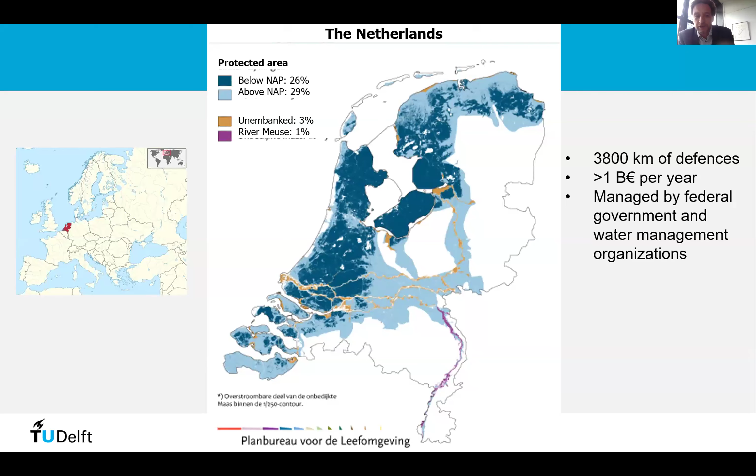And to protect these areas from flooding, there's around 3,800 kilometers of defenses, which we'll see later. And because it's a national priority, there's also a large continuous investment budget of around 1 billion euros or more per year to continuously invest in upgrading the defenses, river systems, and so on, which is done in an interplay between the national government, Rijkswaterstaat, and local water management organizations.

A bit more about the system, and today we'll focus more on the coastal system. We have here what we call the Holland coast, North and South Holland, a very nice sandy coast with high, strong dunes, which is kept in its present state and volume with large-scale nourishments.

After the 1953 disaster, where a large part of the southwest was flooded, a whole series of dams has been built to what we call shorten the exposed coastline. Storm surge came in here from the North Sea to those islands in Zeeland in the southwest, and dams were built to block that storm surge. Some of those dams are closed dams, and others are, as we'll see in a minute, storm surge barriers, like the Maeslant barrier near Rotterdam at the entry towards the city, those two massive gates preventing the storm surge going in.

And here, if we go more to the north, you see this red line, which is what we call the Afsluitdijk or closure dam, a 32-kilometer dam which was built after the 1916 storm surge. This was still open sea. Amsterdam's here. As a response, a dam was built to, again, shorten the coastline, preventing that storm surge from coming in. And as you may also know, large-scale land reclamations were built behind it. For a long time, it was the longest dam in the world, but in Korea a dam was built which was just a few hundred meters longer. This one was finished in 1932.

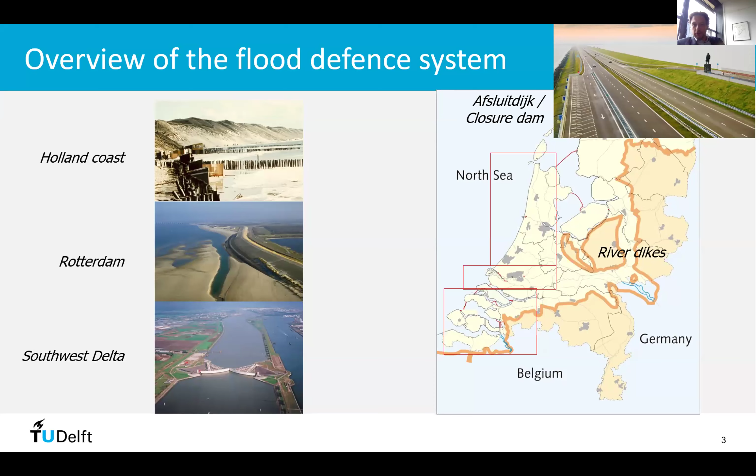And of course, given the low-lying nature of the Netherlands, there's a lot of attention and interest in the possibilities of sea level rise. If we look at the global scenarios, which are also downscaled to the local level, we see that projections differ between 1 and 2 meters in the coming centuries in case of the unlikely low emission scenario with only a 1 degree warmer world, and 2 to over 5 meters in a significantly warmer world, 5 degrees Celsius. There are also IPCC scenarios which project even higher sea level rise, but climate scientists indicate, well, we're not sure and they're unlikely at this moment.

And not surprisingly, a lot of the attention goes to those high-end yet low probability scenarios, for example, 10 meters. If we look at the Afsluitdijk, the closure dam, there's the statue of the engineer who invented it, Cornelis Lely. And Greenpeace already put him in a life jacket. Indeed, if we talk about 10, 15 meter sea level rise, the statue of Lely will be fully underwater. And it will be very hard to defend the west of the country from these orders of magnitude of sea level rise with storm surges on top.

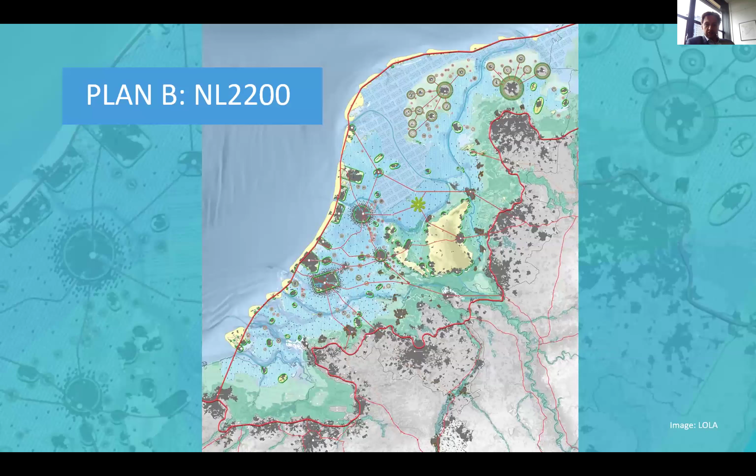And driven by those scenarios, there are planners that really think in a futuristic manner about the future of the Netherlands. Maybe we can retreat to higher ground and build our cities there and have a few floating cities or archipelagos. There are also images like these, Amsterdam underwater, or our other major city, Rotterdam, underwater, which of course trigger a lot of attention and debate, but they focus on these high-end, very far away scenarios.

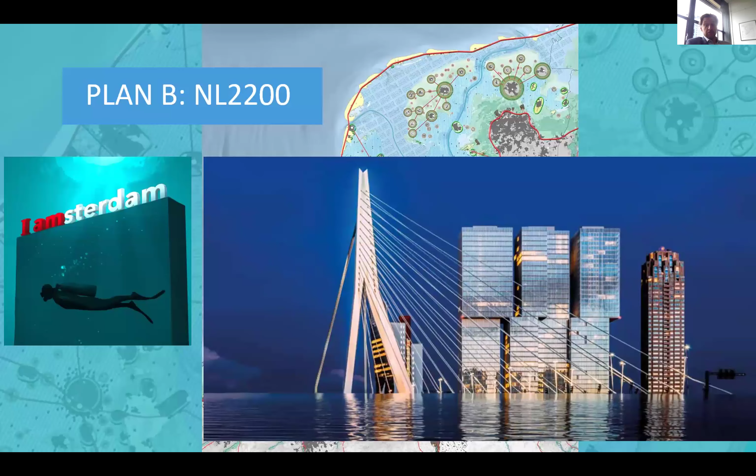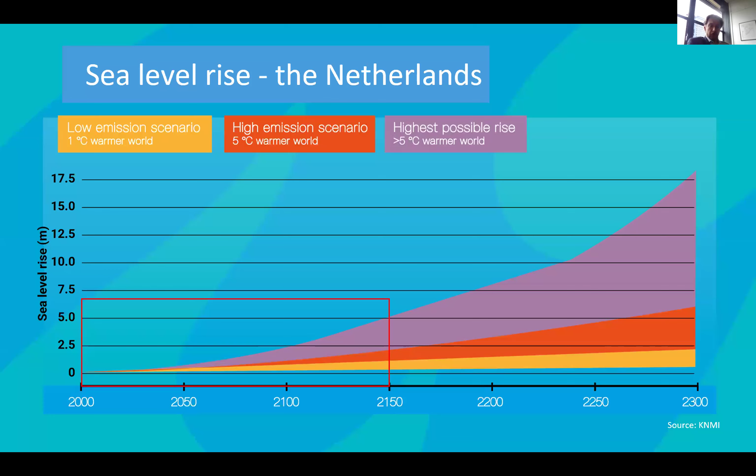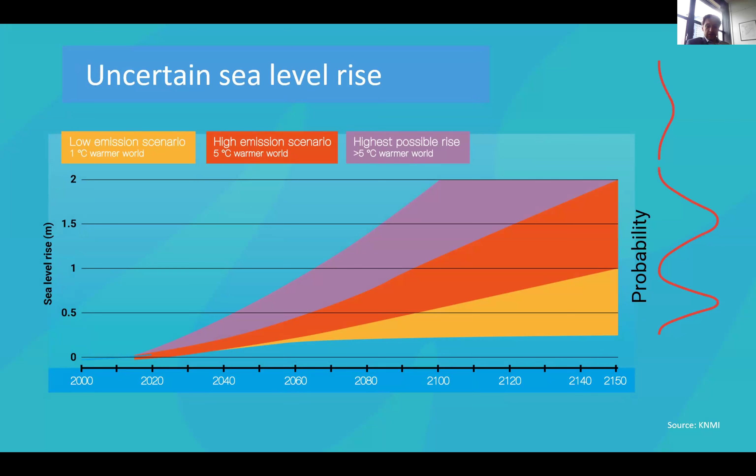As engineers and planners, we also think let's look at planning horizons. Typically for infrastructure, we take 50 to 100 years, but let's extend it to 150 years and zoom into the sea level rise that we can expect then. And then we are talking about these scenarios. So even in the higher end scenario, 1 to 2 meters. And recently, we've also been working with statisticians and risk analysts on the Bayesian approach, where probabilities indicate a degree of belief: bringing together different expertise, how likely are the different scenarios, what is their probability?

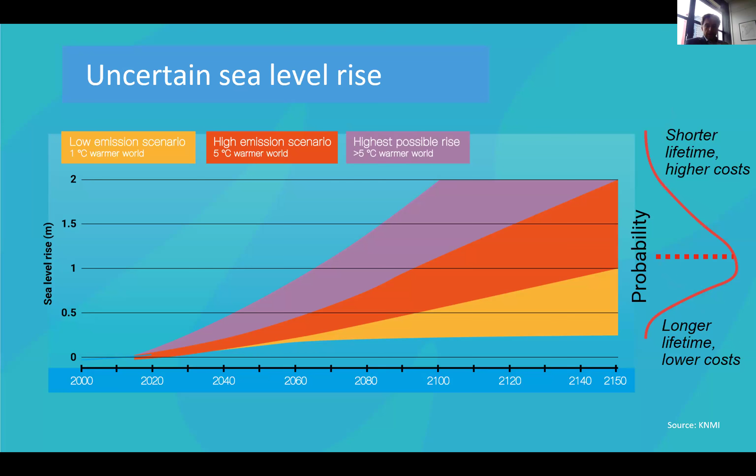Can we also come to a combined probability distribution of future sea level rise? And we also coupled that to, let's say, the cost: if we do coastal intervention, should we base ourselves on the high scenario, where we have a higher cost but build in extra safety, or should we go for the lower scenario?

And the outcomes were that, if you have those different options connected to the likelihoods of the scenarios, an approach somewhere in the middle or a little above the middle, where you kind of balance out over-investing and under-investing, seems a reasonable approach. If you do that, of course, if sea level rise goes faster, you have to come back a little bit earlier. If sea level rise goes slower, then you have a somewhat longer lifetime of your infrastructure.

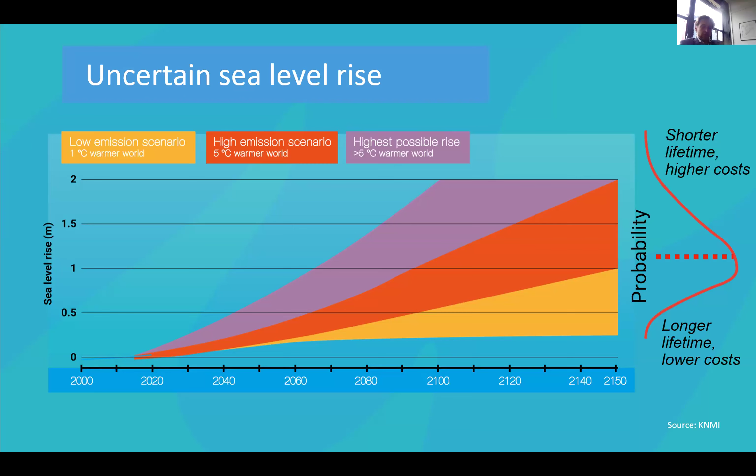But even in those high sea level rise scenarios, we would expect 1 to 2 meter sea level rise in the coming century. And the question is, what can we do, and what are our adaptation options in case of the different ranges of sea level rise? Then it's also wise to look back a bit and say, how much have we adapted over the past century and in the past decades?

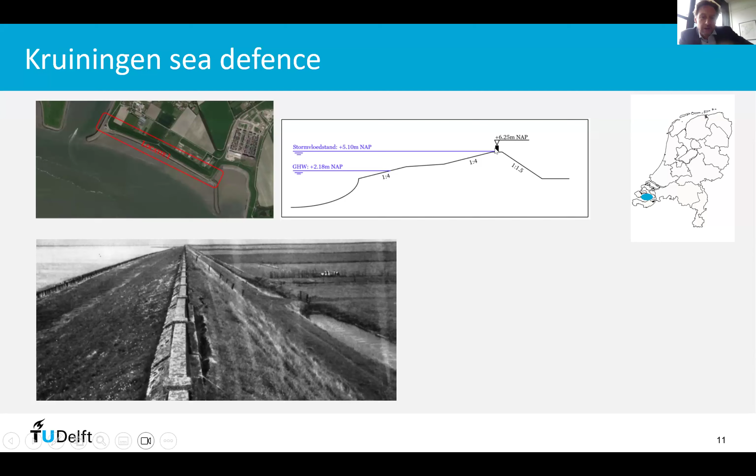And here we zoom into the Zeeland area that was flooded during the major storm of 1953, which also affected the UK and Belgium. And this was the sea defense at Kruiningen before the storm. So a 5-meter high, what we call, embankment dike with a crown wall on top going to about 6 meters. This is what it looks like now. And one of our students made the cross sections of that defense over the last decades. So it started, in green, with the 5-meter high defense with the crown wall on top.

It was after 1953 upgraded to 7.5 meters, and 15 years ago it was upgraded to 9.5 meters. So already within 70 years this has been upgraded 3 to 4 meters, and in case of an extra meter of sea level rise we would have to add to that. So our previous generations have been able to adapt the defenses in many parts of the Netherlands for several meters within a couple of decades.

And in that context, adapting for 1 or 2 meters of sea level rise for a defense like this seems feasible, at least from a technical point of view. However, if we go higher, as you see here, we also go wider. And in a densely populated country, that may also lead to some interferences with existing functions and spatial planning.

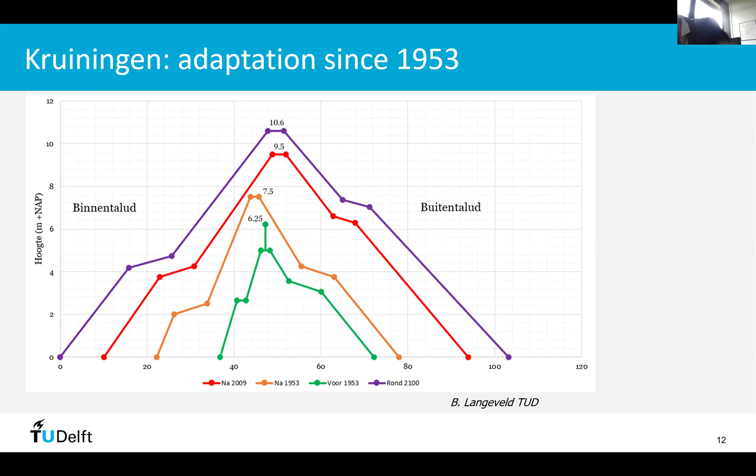I'll plug in my power for a second, just to make sure I'll stay with you for the rest of the presentation.

That's why we've been systematically reviewing the various types of coast and asking, what are the adaptation options and how would they scale in the future? As mentioned, for the Holland coast, the sandy coast, there's the flexible nourishment strategy, shifting from really localized nourishments to mega nourishment. This is the sand engine or sand motor, where sand will be distributed along the coast over time. Currently, it's about 12 million cubic meters per year.

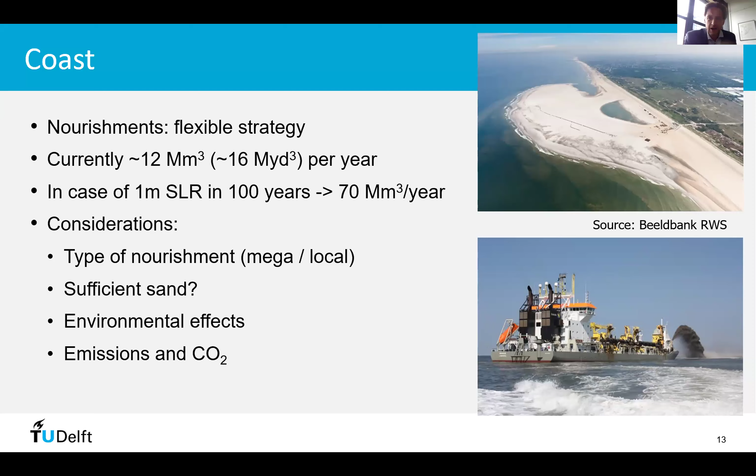In case of a meter of extra sea level rise, that would scale to 70 million cubic meters per year. And that seems, in the current context, feasible in the North Sea, with a very large sand supply and efficient dredgers that work at relatively low cost. For other parts of the world, for example Singapore, where sand is very high priced, that may be a different story. And people are already thinking about how we can scale up that process. What are the areas where we can win or mine the sand, if you will? What are the environmental impacts?

And the expectation is that in the current reservations, at least for the coming 100 years, there's enough sand available, and that more is possible if we would allow more dredging or also use the wind farm areas. And there are also interesting ideas: dredging is now often done with fossil fuels, so to link it to wind energy generation. And of course, we have to think about the environmental effects.

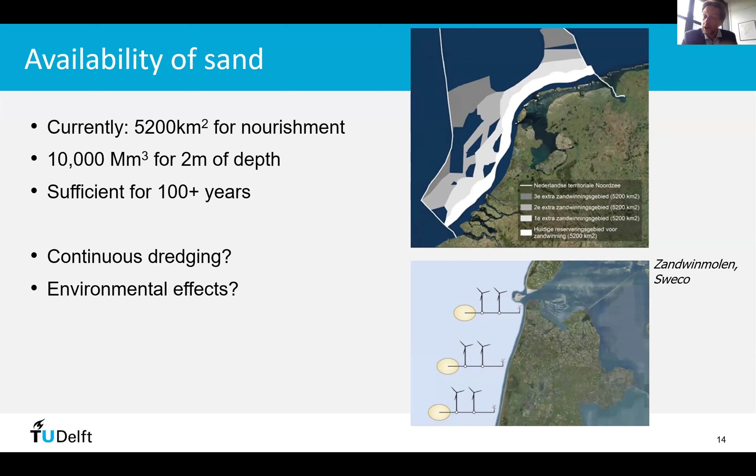I mentioned the storm surge barriers. So these are in other parts, the southwest, these are the gates that are normally open. Here's the Eastern Scheldt barrier to allow tide to go in and out, but can be closed during a storm surge. And these were built after the 1953 disaster. And there in that system, we already see that there's the barrier, behind it the system with intertidal flats

and dikes, that those intertidal flats are already decaying because of the narrowing effect of the barrier, because of some other effects. And there, a strategic discussion is taking place. Well, should we improve the barrier by closing it more often and even structural reinforcement? Should we partially remove it and strengthen the embankments around the estuary and to mitigate the environmental effects? Right now, they already started nourishing those tidal flats, basically to help nature a bit.

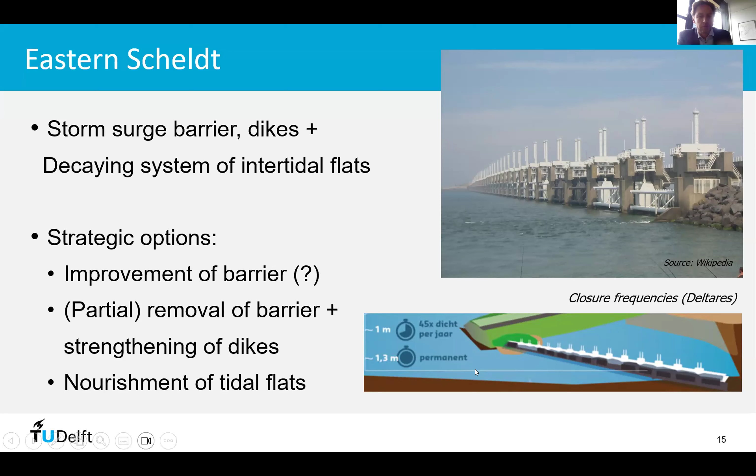And so for this estuary, we see that the barrier, if sea level would rise 1 meter, it would already close from on average once per year to every week. And if you go even higher in the lower panel, it would even be permanently closed. So there we see that maybe even tipping points will come.

A bit more attention I'll pay to, well, the barrier that protects the city of Rotterdam. Already introduced the Maeslant barrier, 2 giant arms the size of the Eiffel Tower. Now we're looking basically from the side of the North Sea towards Rotterdam, and these gates close during the storm surge to basically prevent that the storm surge propagates into the Rotterdam area.

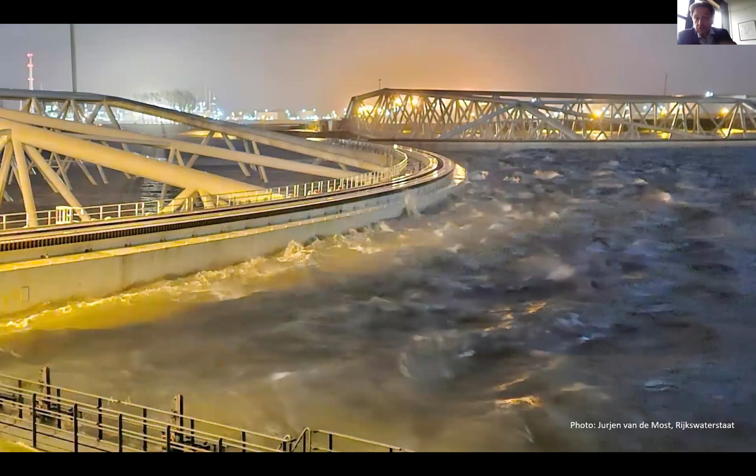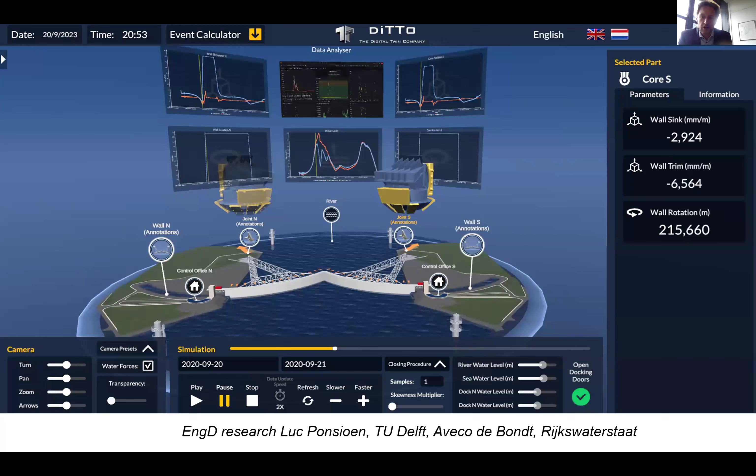And well, it's successfully closed every year during September as a test closure, but was successfully closed 1.5 years ago in winter during a winter storm, where the gates are being floated in and then sank to the bottom, as you can also see here. So it was successfully closed. We also work with the operators and managers, Rijkswaterstaat, so the Dutch Environment Agency, Army Corps, on developing new expertise and knowledge, because they have challenges in managing this very complex structure.

One of our researchers developed a pilot of a digital twin for the Maeslant barrier, where actual sensor data on the positioning of the barrier, the floating process, the tilting of the gates are being used, and where also past closures can be analyzed and replayed. Also, if you want to train future barrier operators, these are very interesting tools and developments. So there as a university, we also try to step in and work with the asset owners to develop new technologies.

But we expect that this barrier built in 1997 can withstand about 0.5 meter sea level rise, and then it will have to close more often and also have some structural effects. So maybe, depending on a lot of factors, in the second half of the century, it will have to be upgraded or even replaced. And that's, of course, a major engineering challenge, but it's also a societal challenge, because decisions that we will make there will also have effect on a lot of the aspects in the city of Rotterdam.

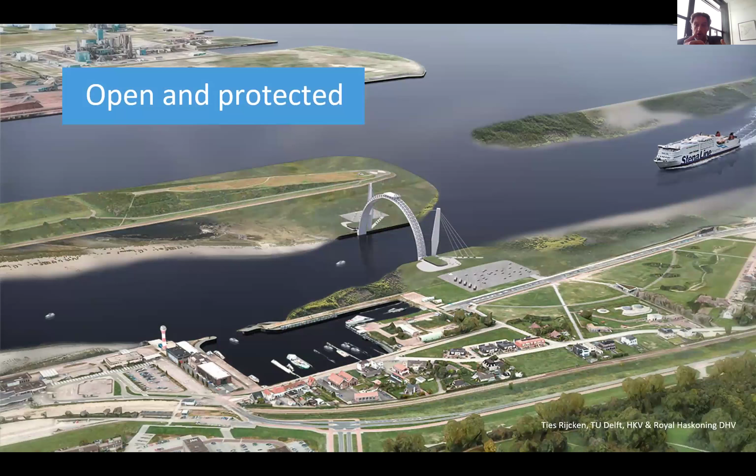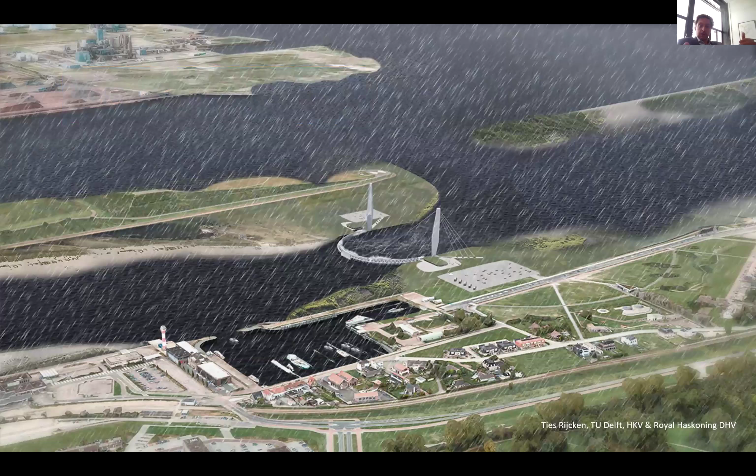The current system with the barrier we call open, but closable, so it's protected: if a storm surge comes, it can be closed. In the case of the scenario that the current Maeslant barrier has to be replaced, a new barrier can be implemented. One of our colleagues came up with this design, a kind of half arch shape, 300 meters wide, 150 meters high. And during a storm surge, it would basically be closed and would stop that storm surge from coming in.

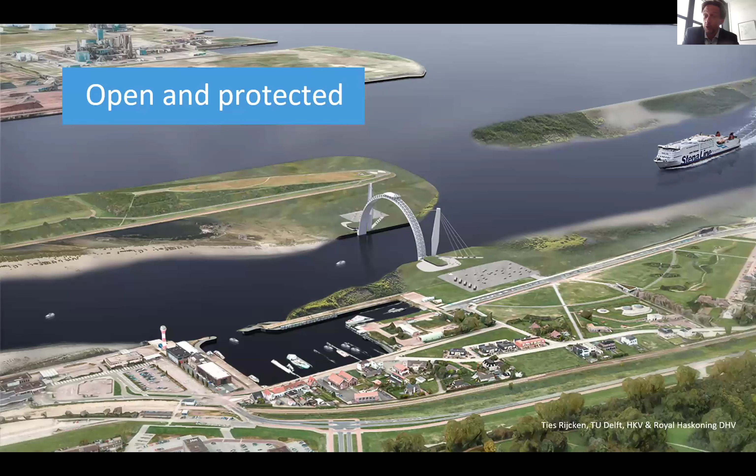And of course, this is an enormously challenging project from a structural point of view, geotech, the whole operation, mechanical systems. It's basically half a London Eye, but then that's moving. Note that he also designed a nice platform on top; we don't have mountains, but with your cable car, you can go up and then have a nice view over Rotterdam and the North Sea and the whole region. So it could also serve other functions, and some of the existing barriers are also landmarks and have visitor centers. That's one perspective where we would keep the system open, but it can be closed in extreme conditions.

One other option is to move towards a closed dam. And why are Amsterdam and Rotterdam called as they are called? Because they were built next to dams. In those old days, they built sluices, built some houses next to it, started taxing the ships that wanted to pass, and so on. So one of the options is to build a closed dam with shipping locks in Rotterdam. And there's all kind of sides to it. It seems maybe to some surprising, but we already have this system in place actually at Amsterdam, where we have the giant locks of IJmuiden.

And of course, you would need also giant pumping stations in and around it, because the River Rhine that's coming from the back would also need to be pumped out. And there's pros and cons to this model, which was elaborated by some retired Delta Works engineers. It's good for coastal flood protection, maybe less favorable for navigation and shipping. It's good for redeveloping those old port areas where you want to develop housing, because the water level there is more controlled. For environmental reasons, where we like these gradients in an open system, well, it probably scores less.

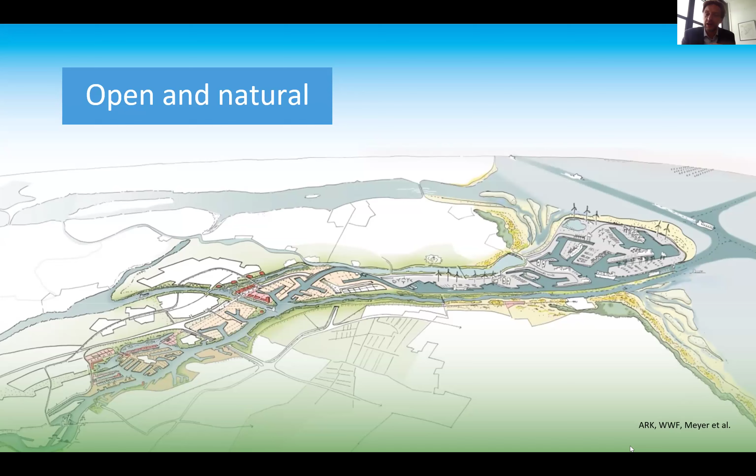So there's also a third direction, which is more environmentally driven, where colleagues from architecture and nature organizations proposed an open and natural system. They say, let's allow sediment to fill the new waterway, it becomes less deep. Let the riverbanks develop with nature, become green zones, and they anticipate that will also block or reduce part of the storm surge propagating into the system. So here we have three distinct alternatives, which have very different impacts on housing, on the city, on nature.

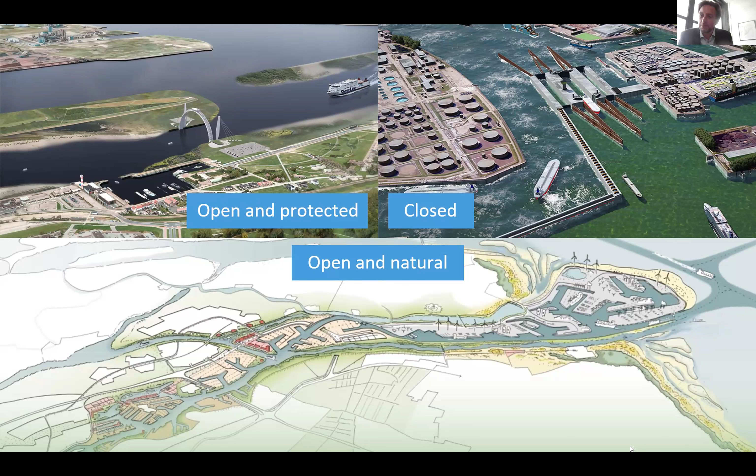Well, what's the future of Rotterdam going to look like? So we also call on our government to say, well, please, we call it design and planning, or research by design. Please work on these alternatives to bring them a step forward and also bring them into the discussion.

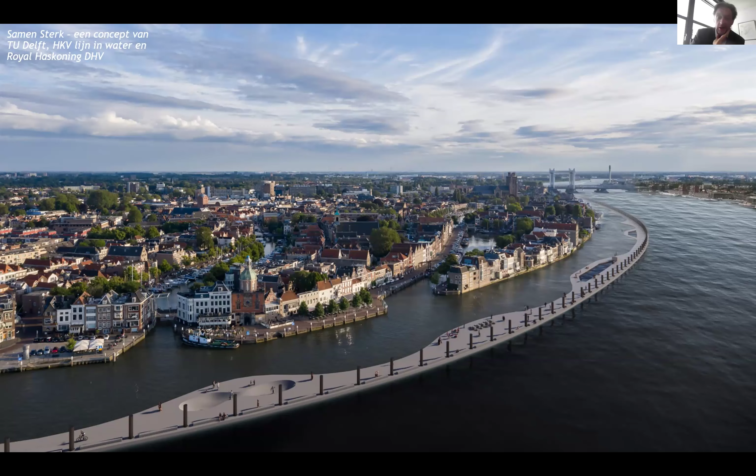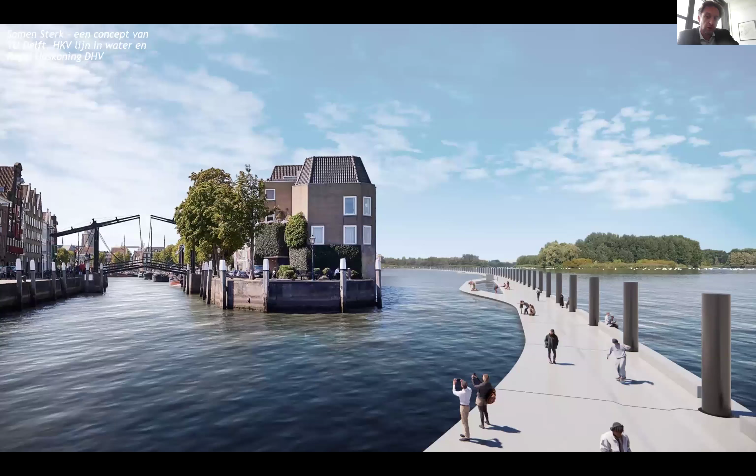And it could also add value to the city in normal conditions. It's a floating boulevard mounted to a structure underwater. And if that storm surge comes, that boulevard is floating up but still connected, so that it becomes a watertight connection. And so from engineering design, we propose, okay, let's move forward on these type of solutions. We're not saying, well, this is the solution one must choose, but at least we think it can help to bring perspective for these kind of questions.

More in general, we're looking in different regions of the Netherlands at what are the best solutions and the possible solutions. And that, of course, depends on the local setting, local needs, but also nowadays it's often preferred, where we can, to apply nature-based solutions. And there's a whole family of solutions. But in general, those nature-based solutions, wetlands, dunes, foreshores, have a somewhat larger footprint and are sometimes only feasible in certain environments. We do a lot of research on nature-based solutions, dunes, but for dunes you also need a wide footprint, often hundreds of meters, to build a full protective dune.

In some cases, when there's an urban area on the coast, we say, well, maybe we need hybrid dunes with a structure in a dune. But there's a lot of questions on how they perform in storm conditions. And to move forward on that idea, our team, colleagues from the department in a research project, built a semi-full-scale hybrid dune, with several types of structures in the dune, right on that giant sand motor on the coast. And they said, okay, let's build it in winter and hope we'll catch a storm. And they instrumented it so that we can measure it.

Well, the good news is they had a storm. The bad news is it was too successful. They had 5 storms in a row, one even during construction. And over Christmas they have worked all the way. And there are some different sections: the hard defense, a vertical wall, which you don't see in a dune, and a hard defense covered by a dune.

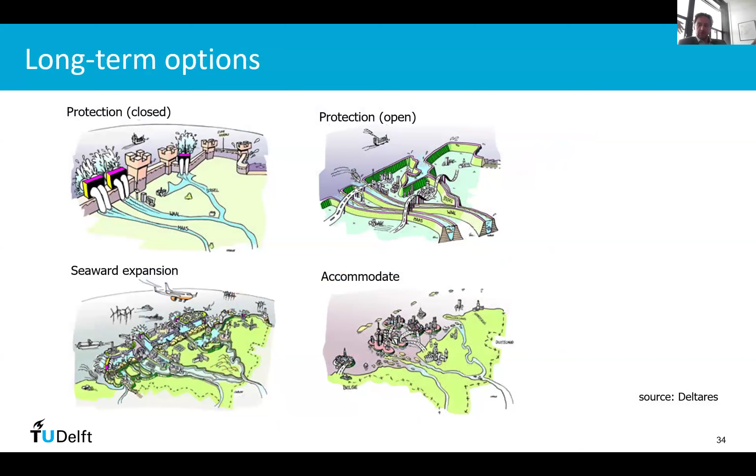Then if we look further, what are the conceptual strategies for multiple meters of sea level rise? These icons or cartoons have been made. Protect, build big walls and pumps; protect in a more open system with storm surge barriers; seaward expansion, so build new islands in front of the coast; or accommodate, or even retreat. Well, the good news is this was at the cartoon level, and everyone has feelings and associations with those. But now the government also made steps in elaborating those a bit further.

One of the strategies is the seaward expansion. A lot of focus goes to the new islands in front of the Holland coast, in front of The Hague and Amsterdam. But the team that looked at it asked, for 2 to 5 meters of sea level rise, what would we do, for example, in Zeeland? Could we build a dam around it? But then the issue with the River Rhine coming in is you also need to be able to pump out a large Rhine discharge, 12,000 cubic meters per second, partially buffer it in the system, but at some point also pump it out.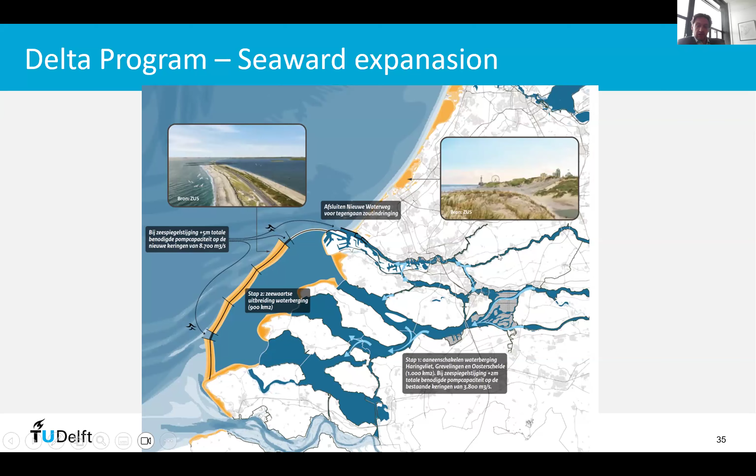So you'll need giant pumping stations. The largest ones in the world are now, I believe, in New Orleans, order of magnitude 500 cubic meters per second. Here we're talking in the thousands of cubic meters per second. So these types of elaborations have also been made.

And if we take it even a step further, we say, well, even if that's not enough, or we have to scale it up, there's the Northwest European perspective, which is NEED, the Northern European Enclosure Dam, which was not proposed by engineers, because we're often blamed for proposing too technocratic solutions, but by an oceanographer. He proposed with a colleague that we could build giant dams connecting Scotland to Norway, and one near Calais in France.

Well, these are really giant, massive projects. The longest dam in the world is on the order of 30 kilometers, so we're talking a length that's 20 times as long. But it's not only about the length, it's also a pyramid or triangle underwater. Here it's 60 to 100 meters deep, so you also need to build a huge structure underwater.

And with the help of our master students we did some interesting initial explorations. They looked at the costs, which were budgeted between 500 and 1,000 billion euros, astronomical numbers. But is it totally unfeasible if we know that the European COVID fund was in the order of 700 to 800 billion?

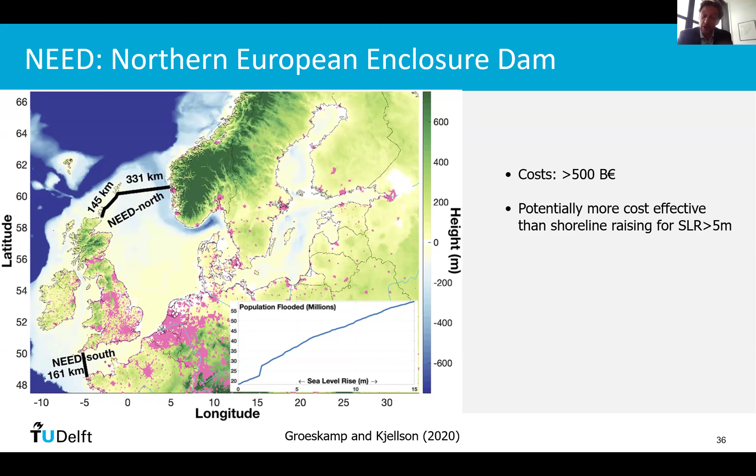And these are just initial considerations. And of course, the message is also, let's not get there, and we hope we will not need these types of solutions, but they're also out there. So if we would go along the line of sea level rise that we expect in the coming 100 to 150 years, we see the current system is already including a sea level rise margin of 0.5 meter for the barriers, 1 meter for some of the coastal defenses.

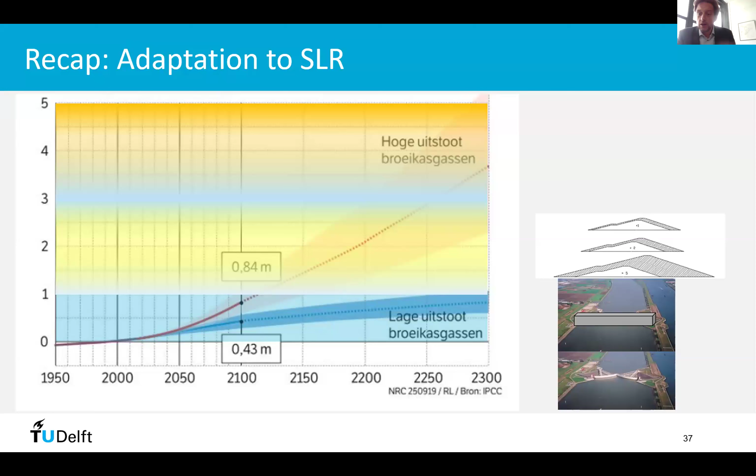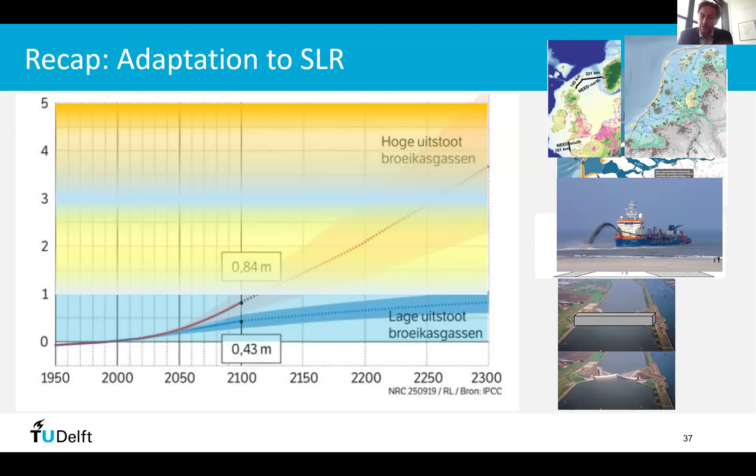Above those values, the first bottlenecks are those storm surge barriers, where new solutions, either a new barrier or dam, are needed. For some other parts of the system, the coastal defenses, the dredging, those can be scaled up to some degree. And once we go towards 5 meters or above, there's more drastic ideas, but those values, if they would take place, we would expect, depending on global warming, in hundreds of years from now. And in that case, if we go really into the acceleration of sea level rise, we would measure it and have some time to adapt to a strategy.

People often ask, well, can we build it? Can we fund it? A couple of considerations. Dutch Delta works were in the order of 10 billion, took careful planning, a lot of learning, a few decades. Another one was the New Orleans hurricane protection system. National priority for the US, brought back the generals from Afghanistan and Iraq from the US Army Corps, said, we have to build this. 1 year of design, then start building. Hundreds of kilometers, $14–15 billion spent, done within 7 years. That's an absolute record speed.

In this gradual coastal adaptation, we are definitely talking about tens to hundreds of billions, and something we would plan over decades or even centuries. And people ask, well, can we afford it? At this moment, we're spending about 1 billion euros in the Netherlands on flood defenses, which is 0.1% of the GDP. For 1 to 2 meter sea level rise, that has to be doubled. So then we go to 0.2. Most of you followed the news. The increases in defense spending that are announced or demanded are orders of magnitude larger. And this is also a different form of defense, but well, to put it a bit in perspective.

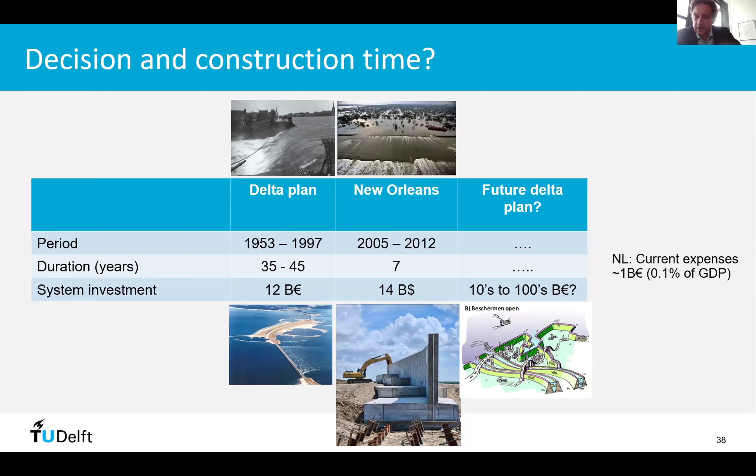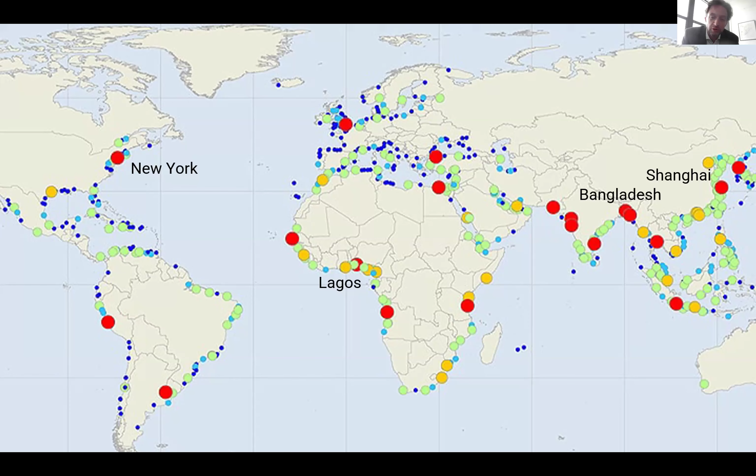So that's the first part. The somewhat shorter part is looking at other parts of the world, where I picked out a few examples where we are involved in studying and thinking along. Of course, around the world, a majority of the global population is in coastal and delta regions and also heavily growing. So many regions and cities around the world, and there's a few examples here. Lagos, Shanghai, New York, also Bangladesh, are dealing with this issue of adaptation, increasing defenses, sea level rise, and so on.

There's also the other side of that, of course, the adaptation capacity. If I want to make Singapore a factor 100 safer, I raise my sea defense by a meter. Also, economic growth is different. And if we talk about risk, we have the probability of flooding and the consequences. And one of the strategies could be that if your economy grows, you want to compensate that by reducing the probability. So, for example, if we take Bangladesh, sea level rise is expected, in the higher scenarios this century, between 60 to 80 centimeters.

Well, more generally, many countries around the world are thinking about strategies for risk reduction and adaptation, where this is a more general mix of the type of things you can do, from nature-based solutions, embankments, mitigating measures, but also planning and evacuation, emergency management. And countries find different mixes of those types of solutions.

We are from TU Delft involved in a number of countries in studies. As examples, I picked three: Bangladesh, Singapore, and Texas. In Bangladesh, we've been involved with the World Bank in studying the question. Bangladesh is rapidly developing. They are in vulnerable coastal zones where a lot of people are located and the economy is growing. The current protection level of the coastal embankments is often around 1 in 10 years, so designed for a flooding frequency of every 10 years.

And the World Bank and Bangladesh are working on upgrading those protection levels. And from Delft, we've worked on better estimating the flooding in those coastal polders, forecasting the future adaptation costs for the entire country based on sea level rise, based on changes in standards.

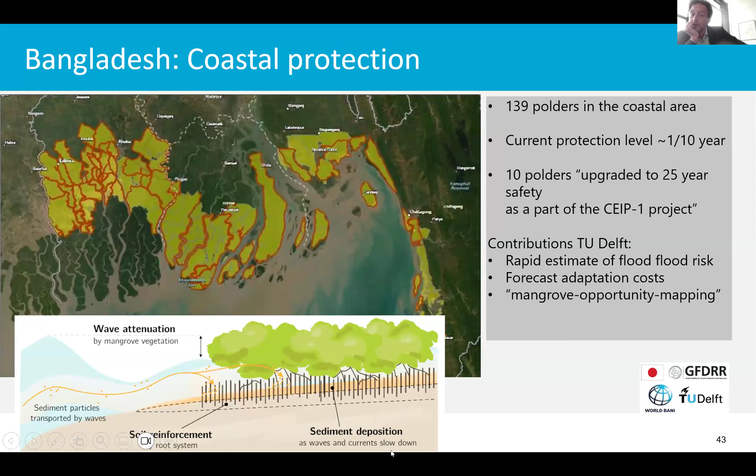We've also been looking at the question, well, where in Bangladesh could we include mangroves as a coastal protection strategy, and maybe even trade it off with embankment raising. And as many of you are aware, mangroves as a nature-based solution can contribute by their growth through sediment trapping, and if they're there over 100 or more meters, they will contribute to reducing incoming waves through the sediment and vegetation.

And then for areas in Bangladesh, our colleague mapped through different layers where we have mangroves already, where the sedimentation conditions are right, and so on. She mapped a number of conditions to say, well, here are the areas where there are really opportunities to promote growth of mangroves and also add it to your coastal protection strategy. And as part of that, the World Bank is also considering to engage and support these types of projects.

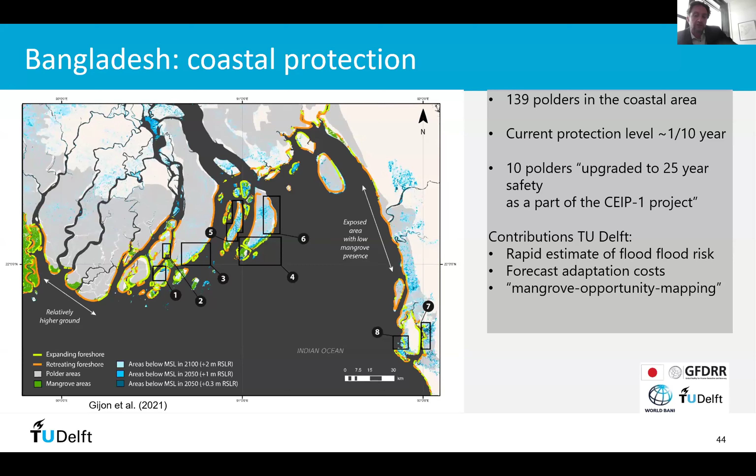Another area where I'm active myself is Singapore, highly developed, densely populated, but also in relatively low areas. So Singapore has now defined coastal adaptation for rising sea levels as a national priority. And they're also thinking about new ways to do that. And they're also expanding land. Singapore's model and growth has been partially driven by land reclamation. And usually that's done by raising the land with sand and other materials. However, the sand has to come from Indonesia.

Sand prices are high. So now Singapore, for the first time, and you can already see it on Google Earth, is completing a polder, a low-lying area with coastal defenses around it and pumping stations to drain out the water, Pulau Tekong, with a lot of input from Dutch and international engineering firms and also marine contractors. So that was already a novelty by itself, with also the risk questions: how safe is it to live in such a polder? How high should we make the defenses and how strong?

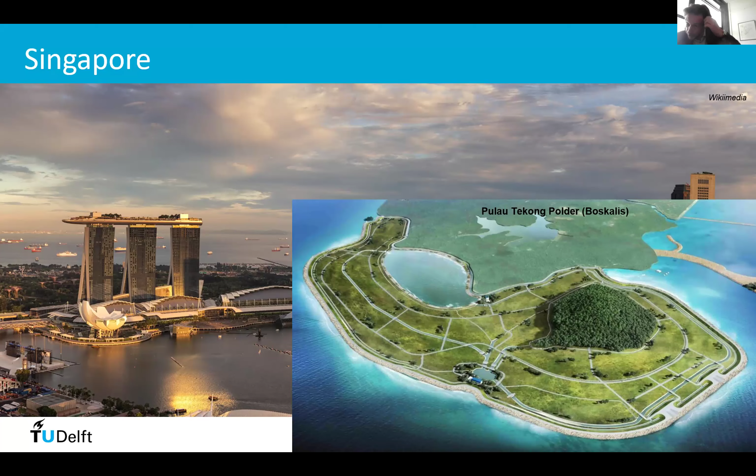And I believe that Singapore has now adopted the most stringent safety standards around the world for the coastal defenses in this polder. But they already have the next land reclamations in planning or on the drawing board, which would be the Long Island land reclamation on the eastern side of Singapore. At this moment, they're considering more traditional land raising reclamation with a water reservoir, where large-scale pumping stations, like they already have now in the Marina Barrage, would be built in a nice lagoon freshwater reservoir.

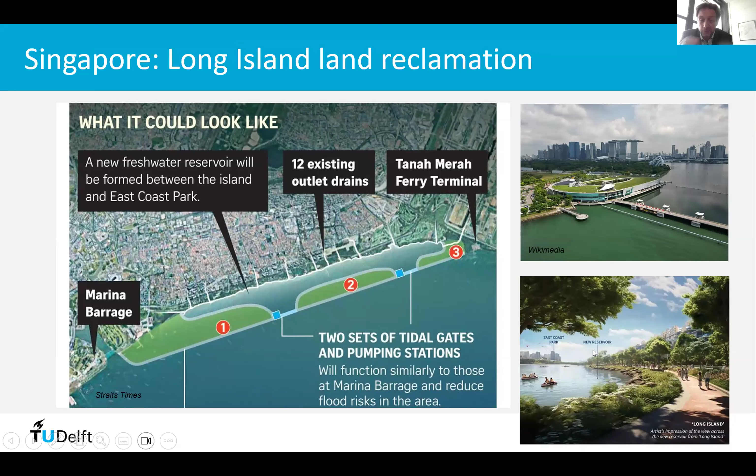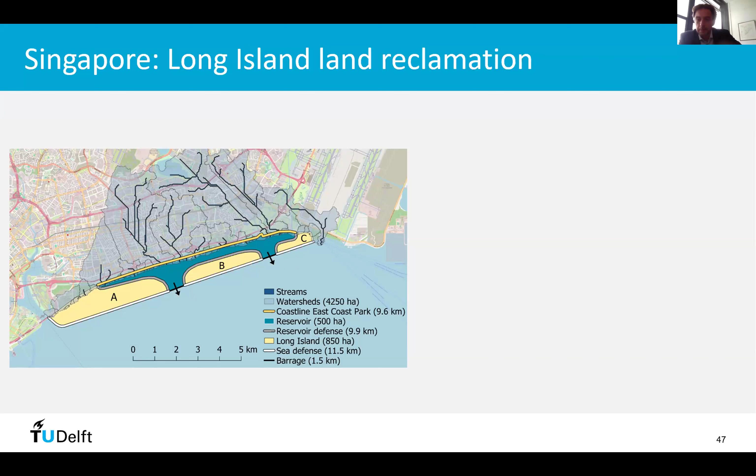And of course, that's also a challenge by itself, because one question is how high and safe do we make those land reclamations? But it's also in an area with tropical rain. How do we drain them? And how do we make sure it's a balanced system? And we're now engaging in some further studies, and often these questions of coastal flood protection, pluvial rainfall, and water storage are still treated in a somewhat sectoral manner. They're each optimized for themselves.

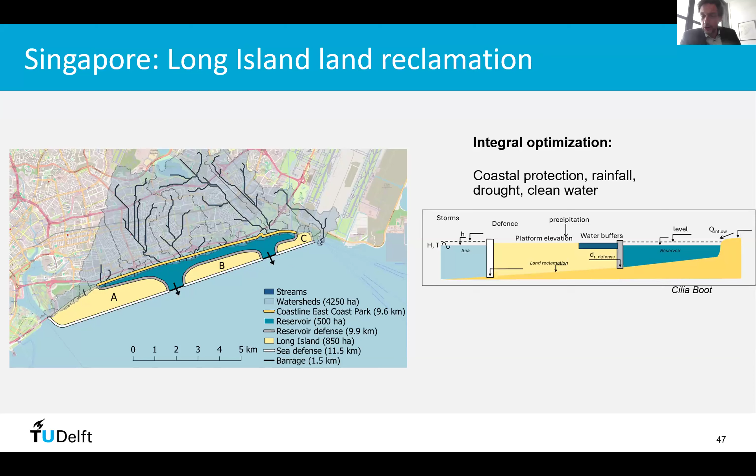And now we're taking a more integrated approach where we say, well, how could one design those land reclamations with objectives for coastal protection, dealing with pluvial rainfall, and water storage? What does that mean for the design of the land reclamation, the shape, the pumping stations, and how do we integrate and optimize that system? And that's something that we're now engaging in with partners at the universities in Singapore.

As a final example, and it's an area that I've worked on a bit more myself, is the area around Houston in Texas, where this is the Gulf of Mexico or America, whatever you prefer. And Houston is one of these economic hotspots in the US. If you take the greater Houston area, it has around 6 million people, and also a large, they call it energy industry around it. And on that Galveston Bay, a lot of the industry is located.

This area is also prone to storm surge flooding, hurricanes, similar to New Orleans, but different from New Orleans, they have much less protection in place. And here you see a schematic hurricane pushing up the water from the Gulf up to those coastal barrier islands where the city of Galveston is located, but also pushing the water into that Galveston Bay, which is the same size, for the Dutch, as the Lake IJssel, IJsselmeer, and also leading to local wind setup.

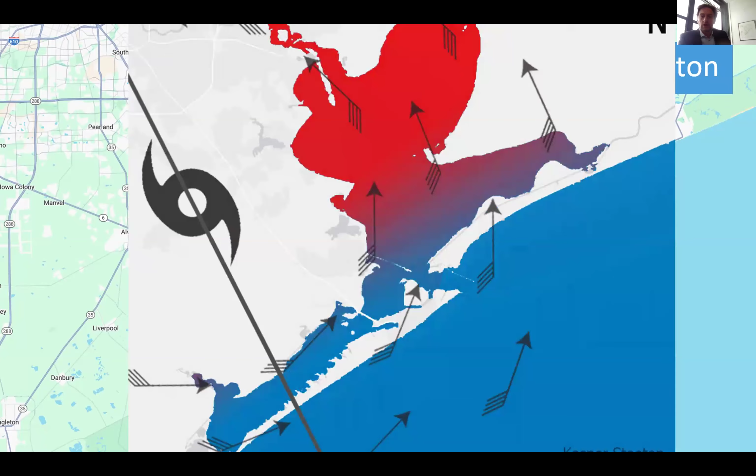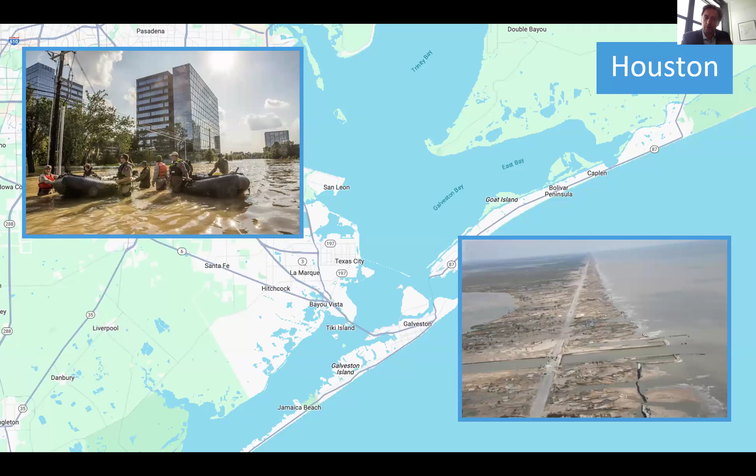And for these reasons, its location, Houston is also known as the flood capital of the US, from inland rainfall flooding during Hurricane Harvey in 2017, but also from those storm surge floods. This is an image from Hurricane Ike, from one of the barrier islands, where, if you look carefully, just one of those houses was standing and the rest was demolished by storm surge waves and wind and so on.

And in 2012, we were approached by academics from Texas A&M that came with a map with a few lines on it, and they said, well, we have this idea of proposing a delta plan that shortens the coastline. We are thinking of building embankments or dunes here and a storm surge barrier here. And they said, well, in Texas, they think we're nuts. What do you think? And we said, well, it looks like our approach for the Delta Works, shortening the coastline. Sounds interesting. Let's study it with students. And that's how we started.

And over the years, a collaboration developed on studying the various components of those plans, where one of the most challenging components is this opening where the circle is, which is called the Bolivar Roads, which is the entrance to the port of Houston, the Houston Ship Channel. What can we do there to build a system, for example a storm surge barrier, that protects when the storm surge comes, but leaves the system as open as possible in normal conditions, because we want the shipping to be going in and out. We don't want to interfere with the Port of Houston, and we want to have a minimal impact on the environment, on the sediments, and so on. So we want a system as open as possible.

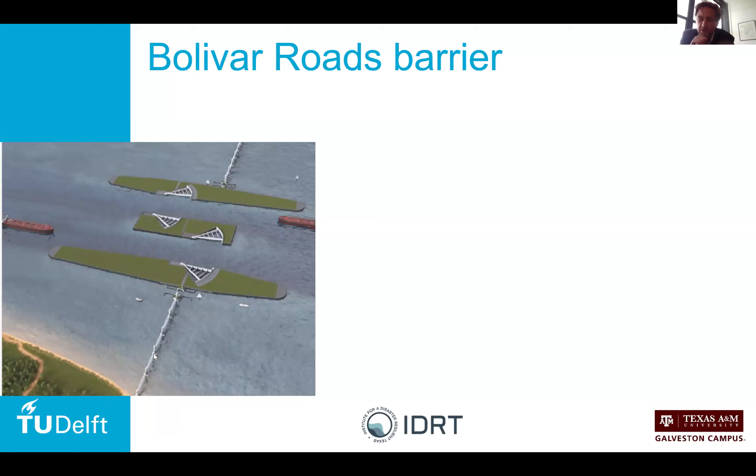So that was the official government plan, which was also approved, supported by the US federal government. Only one detail is that the plan is supported and approved, but no funding to design and build it is yet appropriated. And then discussion started a few years ago that the Houston pilots ran this plan in their simulator, and out of the 15 runs that they did, there were 3 collisions or near misses. So they said, we're unhappy with this gate proposal. They're not wide enough. They're 650 feet, 200 meters. There's an island in the middle, the location.

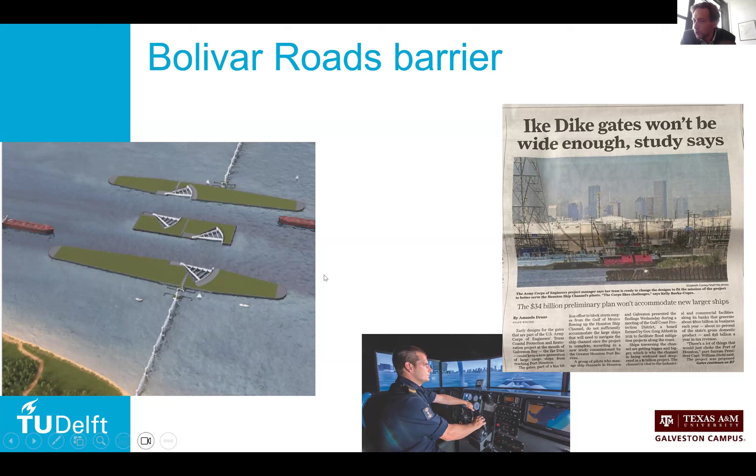So right now we are also supported by the state of Texas, with the academics from A&M, Galveston, and others from the private sector, working on studying, can we improve, optimize this plan, where we move the location so it's in a better alignment with the ship channel and the turns that they make, where we change from the 2-gate opening with the island in the middle to a single gate opening, where we would have, the current Maeslant barrier is above 300 meters wide.

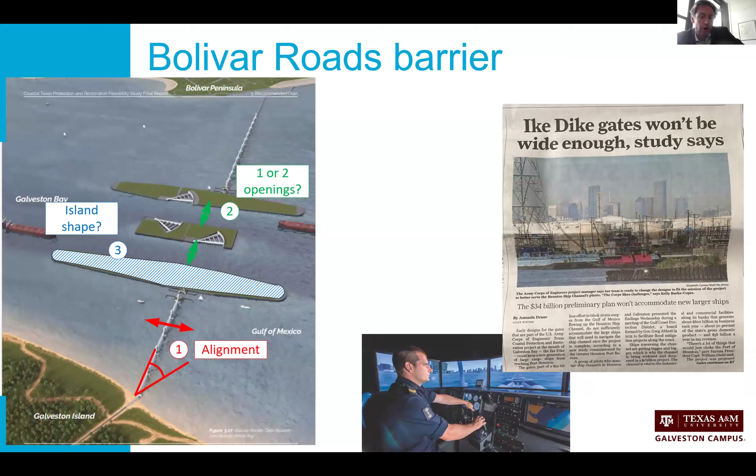Here we would want to go for 400, 450 meter wide. Everything is bigger in Texas, they say. Well, those kind of studies are ongoing and also contributing to the planning. Well, in the end, it could look like this. So a combination of the very large Maeslant barrier or sector gates in combination with the sluice gates.

And then, of course, here the navigation is key, but as I mentioned, also the environmental impact. Where the Eastern Scheldt barrier closed the cross-section for more than 50-60%, current gate designs here would limit that to around 10%. Still there could definitely be impact; it has to be assessed, studied, discussed. But also in this new generation of Delta Works, of course, we try to do better.

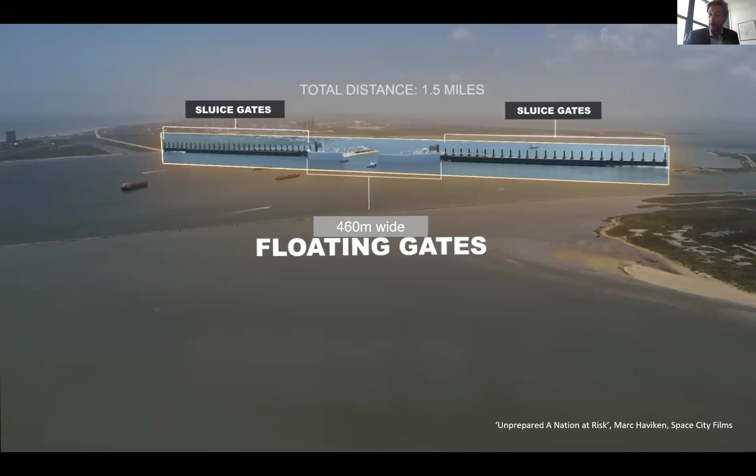And of course, it's interesting to contribute to these kind of plans and ideas internationally, but also in the Netherlands, we can learn from these new mega projects for our planning of our next generation of Delta Works. So in the end, a more complete system plan has to be developed and planned, which includes both the structural elements, the gates, but also many nature-based solutions along the coast.

The concept of the hybrid dunes, remember where we did the test, is being studied. And then even when you have protective features here on the coast, you could still have wind setup in Galveston Bay, where the nature-based solutions, the wetlands on the bay shoreline, would definitely play a valuable role. So that also gives us energy and new ideas to continue studying those.

Well, I think we're coming towards the end of the talk. We once more return to the Afsluitdijk closure dam in the Netherlands, the statue of Lely. There's an inscription on it that says, "A nation that lives builds its future." So we're studying and building the future and also the solutions for the future, where a lot of new academic knowledge is needed.

For the Netherlands, if we talk about 1 to 2 meter sea level rise, with all the solutions and the costing, we're confident that there's good options. Yes, we can. It's definitely going to be a large mega effort. And because we need the time for careful planning, with the first bottlenecks like the barrier in Rotterdam, it's really time to start now with planning and elaborating those regional strategies. And we need new innovative solutions, Delta Works 2.0, to do better.

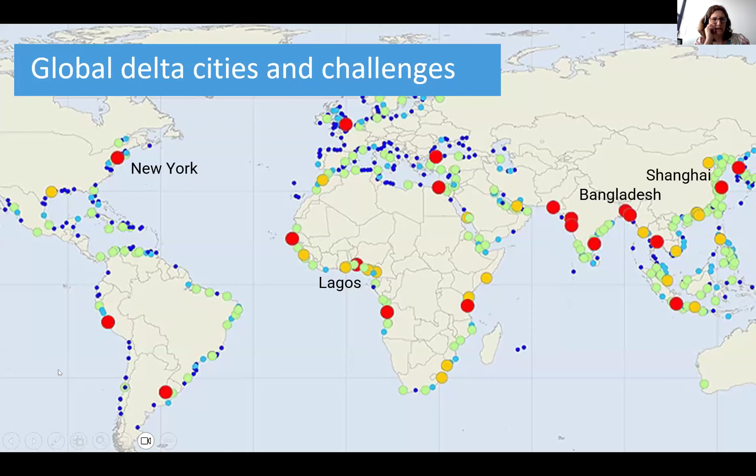So you talked a lot about nature-based solutions, but in many cases not as the ultimate solution. In many cases they need to be accompanied, or there needs to be some sort of hybrid solution between engineering protection and nature-based solutions, partly because of land, etc. In many developing countries with large exposed coastlines, Indonesia being one, the costs of building engineered defenses are sometimes prohibitive, and maybe not desirable from an aesthetic point of view. How effective can we really say nature-based solutions are in such contexts, and what reliance can be had on them? Yeah, good question.

Plus, there are several elements to that, but one important step is that we say, well, do they fit in the local environmental physical system? Sometimes if there's no nourishment, or if the mangroves don't grow, or the wetlands decay, that's an important question. Then we're also studying, if we have or build those nature-based solutions, how much will they contribute to wave reduction? So what's their coastal protection value?

Of course, we also look at the co-benefits. In many areas of the world, we are involved in projects in Indonesia on mangrove restoration. They definitely provide a lot of services and benefits, and up to a degree, a level of coastal protection. But there, I think the challenge is, if you want to go to higher levels of coastal protection beyond the 10-year return period, you need to add probably some hard elements to it, or adapt the buildings behind it. So there are limits to the protective value.

Maybe one exception is the dunes, either natural or nourished. In the Netherlands we have dunes that are designed to withstand storms with 10,000-year return periods. But then you talk about a dune system 500 meters wide, 10 meters high. You need a lot of dune, but they are also great recreational areas. So the answer is that yes, they have a lot of value. There are limits to it. And in the end, it's site specific.